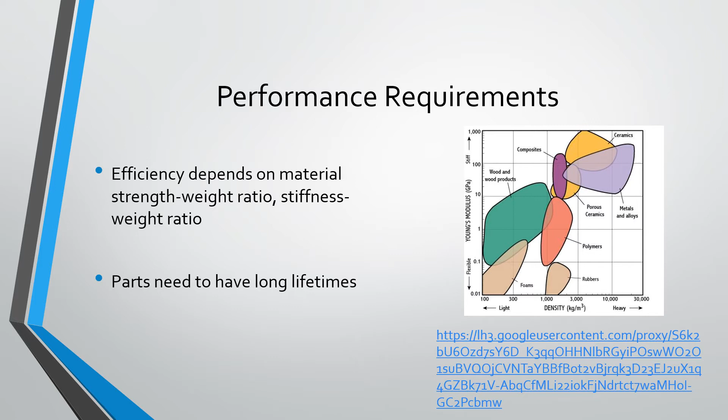Composite materials fit these performance requirements extremely well. To begin, they have a very high stiffness to weight ratio due to their high strength but low density. Also, composite materials allow for different fibers to be used depending on the application. In the case of wind turbines, blades need to be extremely long, upwards of 80 meters, in order to have high efficiency. This requires extremely strong fibers that are often more expensive. But in the case of hydroelectric, blades can be much smaller, and so cheaper, weaker fibers can be used and still achieve a high level of efficiency.

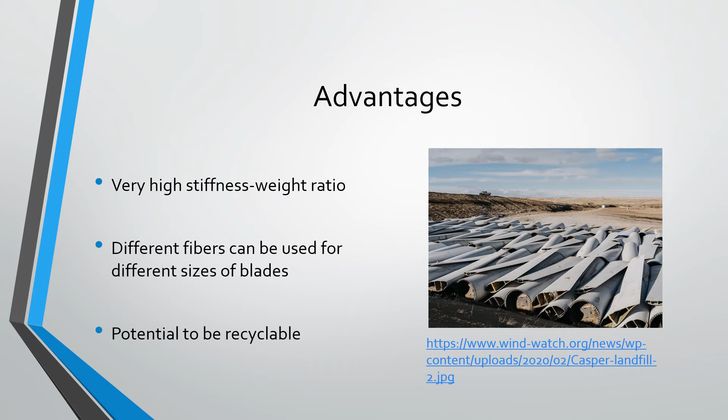One other potential advantage of composite materials is the potential for them to be recyclable. Due to the high manufacturing costs of things like wind turbines, lifetimes of these turbines need to be extremely long in order to maximize the power generated. One way around this, however, is through the use of recyclable wind turbines, which would greatly decrease the manufacturing costs and therefore improve the cost effectiveness of these energy sources.

There are some downsides to composite materials, however. In general, composites have lower thermal stability than metals or ceramics. In the case of jet engines or combustion engine turbines, blades are usually made out of metal alloys or ceramics due to the high temperatures that these scenarios undergo. But when used in environmental atmospheric conditions, the temperatures that composite turbine blades undergo and need to be able to withstand are not nearly as high. One other potential disadvantage of composites is that the strength and stiffness can vary based on the manufacturing quality, which is not generally as common in metals or ceramics.

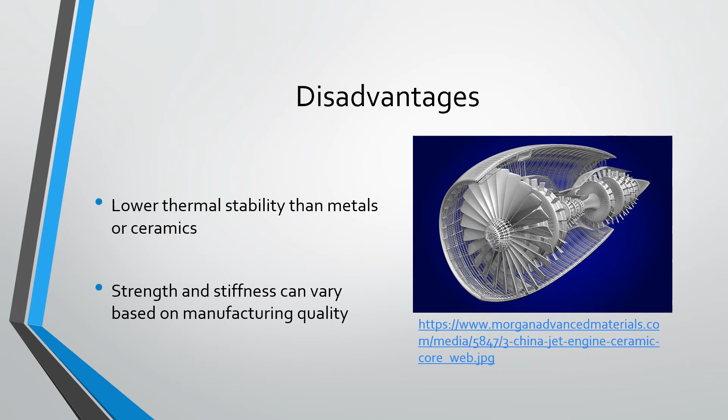The most common composites used in renewable energies are either glass or carbon fibers. In turbine blades, these fibers are often paired with epoxy or polyester resins. And in solar panel substrates, these fibers are mostly paired with thermoplastic resins, the most common one being polyamide.

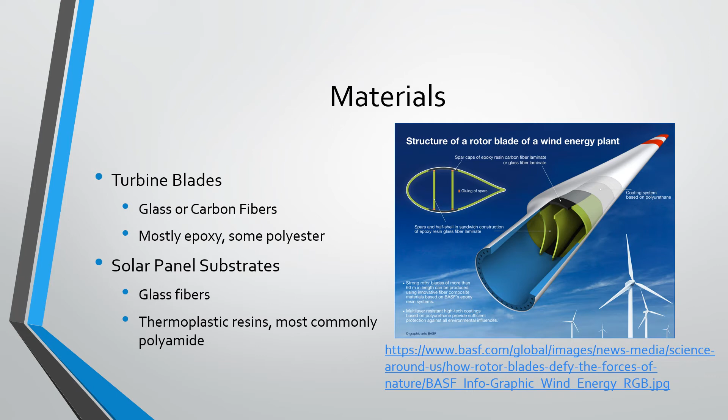On to the manufacturing and structure of the materials. Turbine blades are most commonly made using vacuum-assisted resin transfer molding, which, as the name suggests, is a version of resin transfer molding that uses a vacuum bag to improve the quality of the composite.

Solar panel substrates are made by weaving the glass fibers in a twill manner, and then this glass fiber polyamide is formed inline into honeycomb panels, as can be seen on the right, to form a solid, stable substrate.

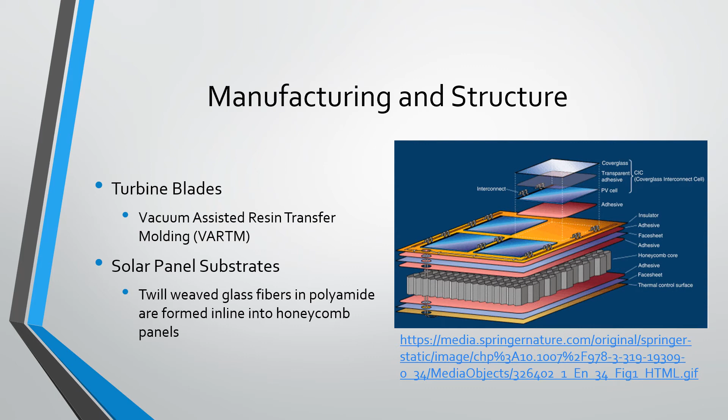There are many new developments that are made possible by composite materials. The image seen on the right is a spiral design for a turbine blade, known as the hydrokinetic energy generator, or HEG, which is made by Kinetic RNG.

Now, this type of blade is only possible due to composite materials, as it is unable to be made with metals or ceramics, since they are not able to be formed in such a way without losing the majority of their strength.

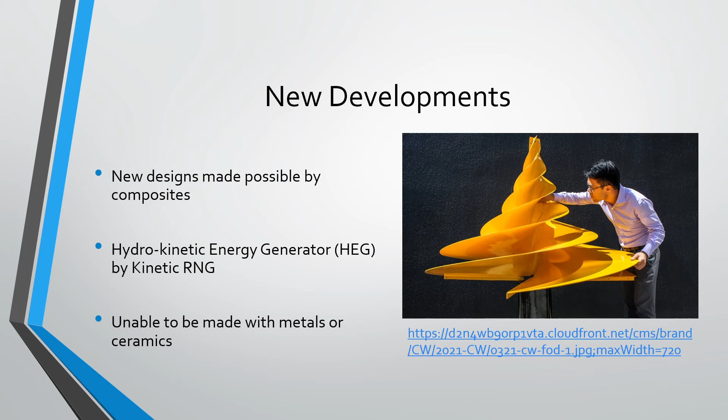Now on to the economic benefits that these composite materials will provide for renewable energies. As seen on the right and mentioned earlier, composite materials will allow for larger turbine blades to be made. These larger blades will cover a larger area in the sky and will be able to convert more wind into usable energy.

In the case of solar panels, composite materials will make panels lighter, which in turn allows for more panels to be installed on residential homes.

Another key factor in the economics of renewable energies is the durability or lifetime of these energy sources. A large portion of the costs of these sources is encompassed by the manufacturing. With longer lifetimes, these parts need to be replaced less often, and oftentimes need less maintenance, which will significantly decrease costs.

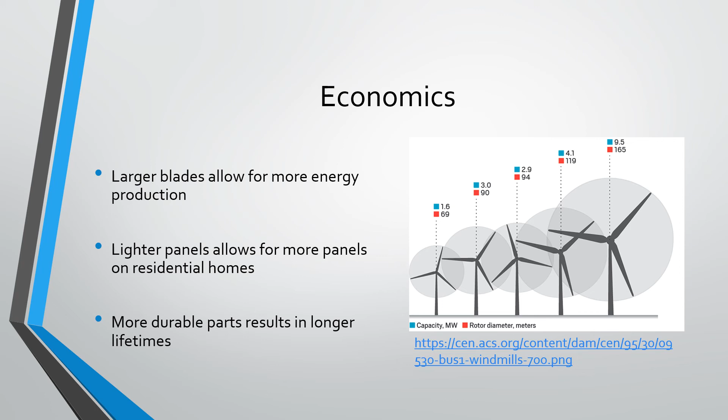As companies of all types of renewable energies work to compete against fossil fuels, innovation is being heavily invested in, in order to find ways to decrease costs of their respective energy. Composite materials provide a large area of interest for these companies and could very well make up a large majority of the materials used in these renewable energy sources.

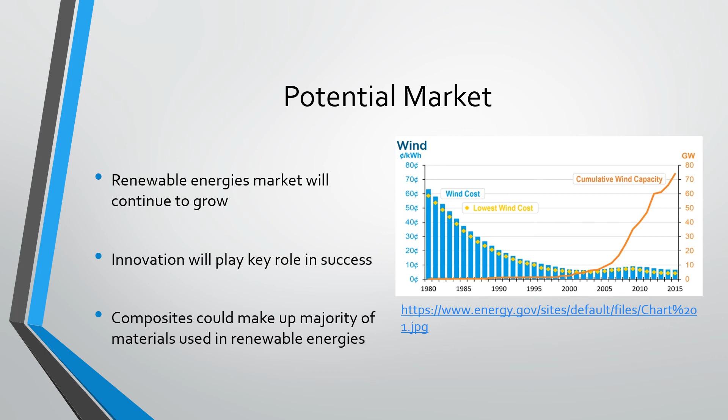In terms of impact on the industry as a whole, composite materials could cause a substantial increase in the production of renewable energies, whether that be through wind, hydroelectric, or solar. And as research into composite materials increases, costs could decrease substantially as well.

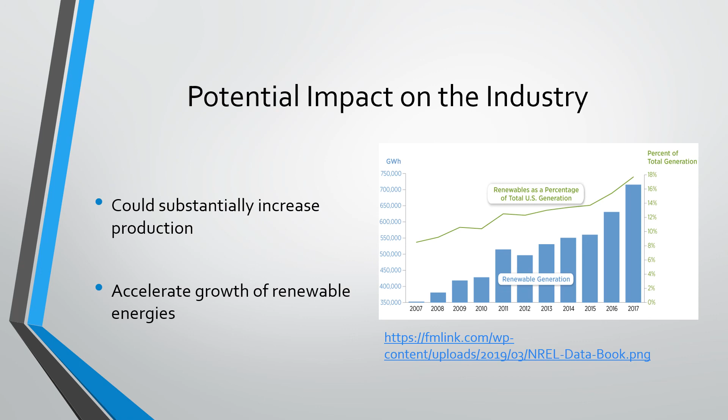This combination of decreased cost and increased production could help to accelerate the growth of the renewable energy industry as a whole, and could provide crucial help in competition with fossil fuels.

Overall, composite materials are a large area of interest for many researchers within the field of renewable energies. Due to their high mechanical properties, light weight, durability, and potential for low costs as production becomes more optimized and streamlined, composite materials are a compelling option for many within the field of renewable energies.

And as renewable energy looks to overtake fossil fuels and become the energy of the future, all areas are currently being looked at in order to find the best way to achieve this goal.